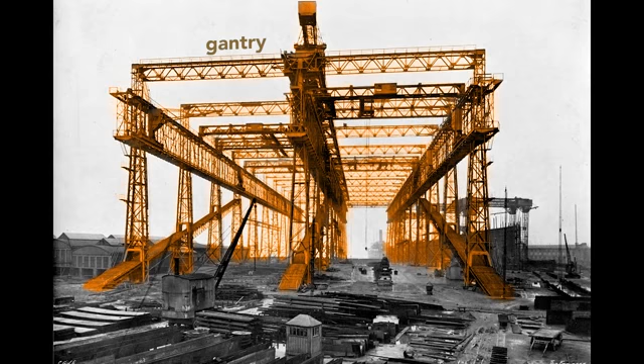This large framework, called a gantry, surrounds the ships as they are built. It supports the overhead cranes and scaffolding used by workers as they construct the Olympic and the Titanic. Notice that just beyond the far end of the gantry lies the Belfast harbor.

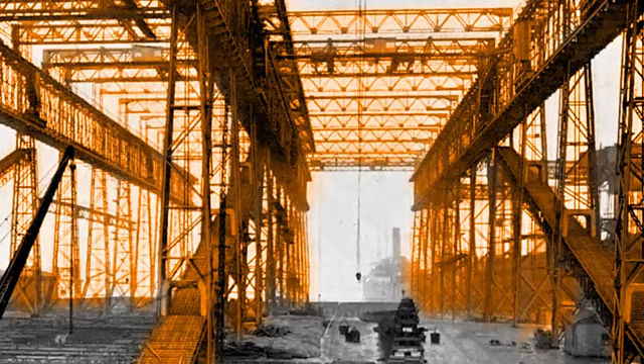Workers will build the Olympic here on the right, and then 9 months later, before the Olympic is finished, they will start on the left the Titanic. When completed, the Olympic stern, or rear end of the ship, will point toward the harbor.

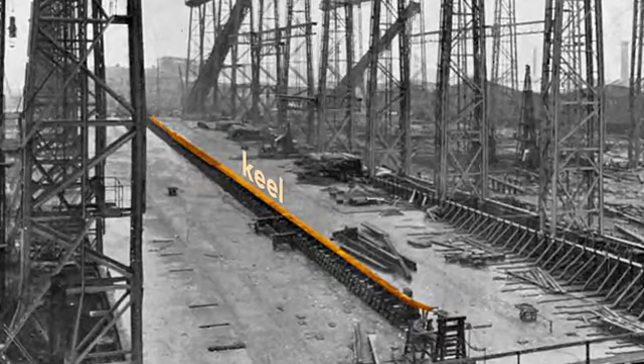The ship's construction starts with its keel, seen here as a long, dark shape. The keel is the backbone of the ship and gives the ship rigidity. If we look at the keel from the land side, we see the keel blocks that support it. These wooden blocks, typically pine, separate the ship from the slip, the concrete floor of the gantry.

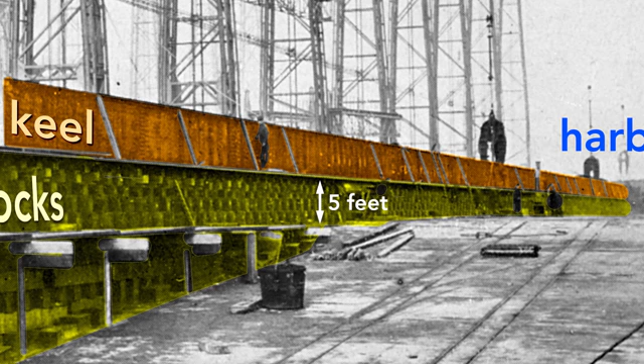It's made of steel plates and is sometimes called the tank top because the double bottom contains 44 watertight tanks. Most of the tanks carried seawater used as ballast to balance and add weight to the ship, but some carried fresh water. In total, the double bottom carried over 5,000 tons of water, or about 1.5 million gallons.

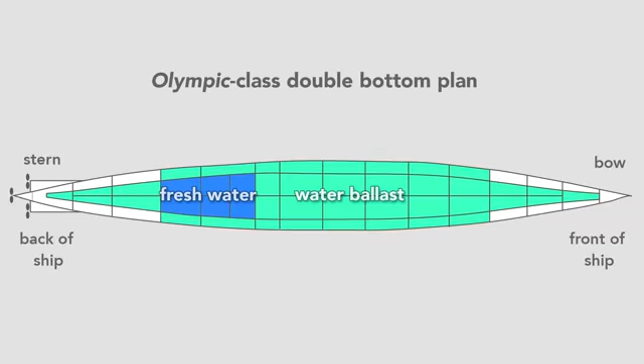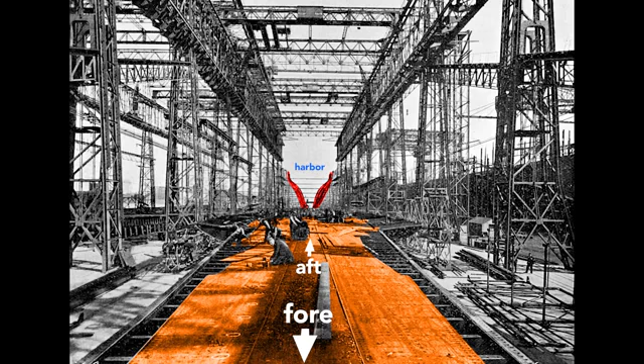Once they finish the double bottom, workers erect the framing for the hull. From this view, we see the framing for the stern of the ship. It's what a worker would see standing on the tank top from the fore and looking toward the aft of the ship. That's where the harbor is. Looking closer, we see the rib-like structure on the start of the transverse frame of the ship. Workers rivet to this frame the hull, which will form the skin.

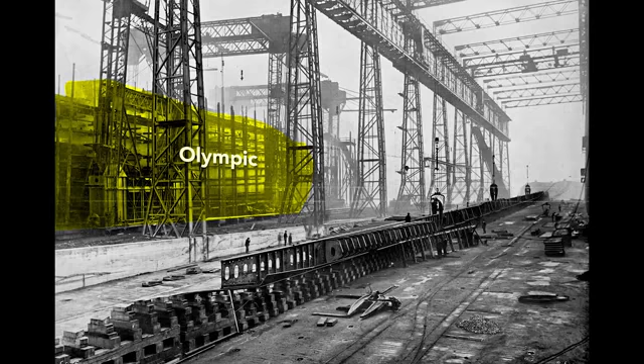So far, we've watched the Olympic's construction. In the gantry, that ship sits here in the background. In the foreground lies the keel of its twin, the Titanic. Its construction began 9 months after the Olympic. We see here, attached to the keel, the framework of the Titanic's double bottom.

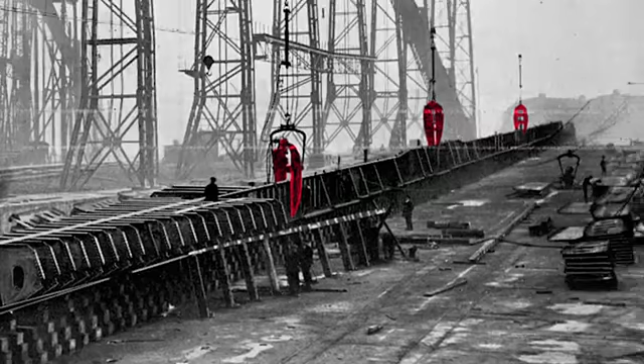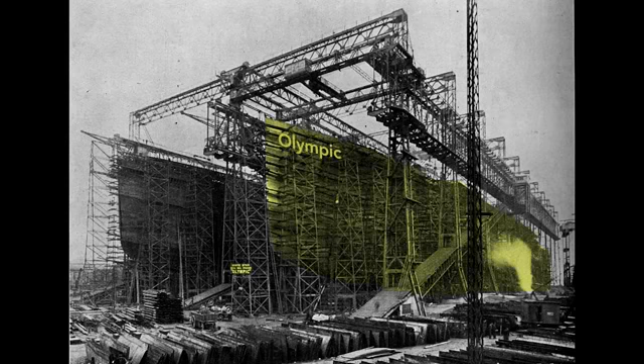Notice this large, claw-like mechanism lying on the ground, and these three hung from the cranes. These are hydraulic riveters, which workers used to install most of the 3 million rivets on the Titanic. Here we see the almost complete hulls of both the Olympic and Titanic. Work inside the Olympic progresses rapidly. The staterooms are being erected, and plumbing is being fitted throughout the ship.

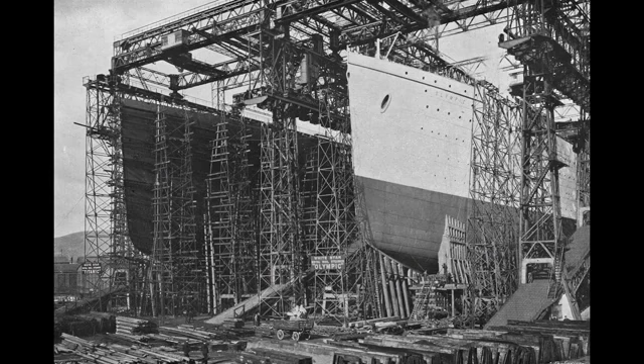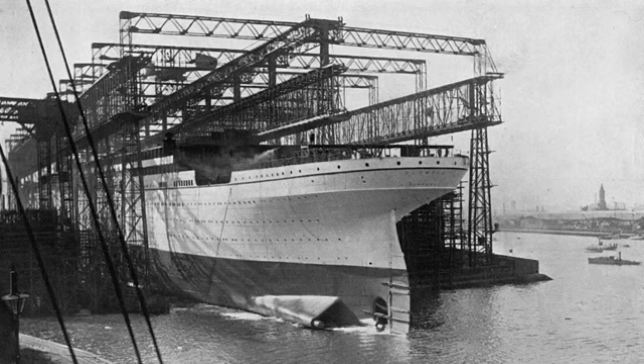To prepare for the Olympic's launch, workers paint the ship a light gray so it will stand out in black and white photographs, although they repainted the ship black soon after its launch so that it matched previous White Star liners. To ease the slide into the water, the slip was greased with 23 tons of tallow, oil, and soap. And then the order to release the ship was given, the hydraulic triggers were released, and the ship slid into the harbor, reaching a speed of 12.5 knots.

Notice that the ship is launched backwards. There are many reasons for this, but among them is that the stern, the rear, is wider than the bow, so it is more buoyant. In a mere 62 seconds after launch, the Olympic was afloat. The moment the ship hit the water is its official launch date, although it was mostly empty.

Here it weighs only about 27,000 tons and so rides high in the water. The draft, the vertical distance between the bottom of the ship and the surface of the water, is only 18 feet. After it is completely fitted, it will weigh nearly twice that, 52,000 tons. With that additional weight, the Olympic will drop until the water reaches the border painted on the hull, a draft of about 34 feet.

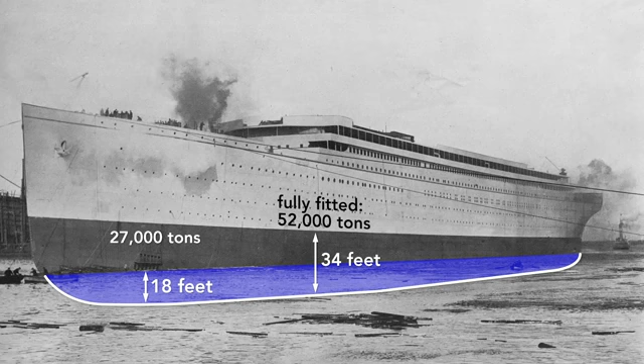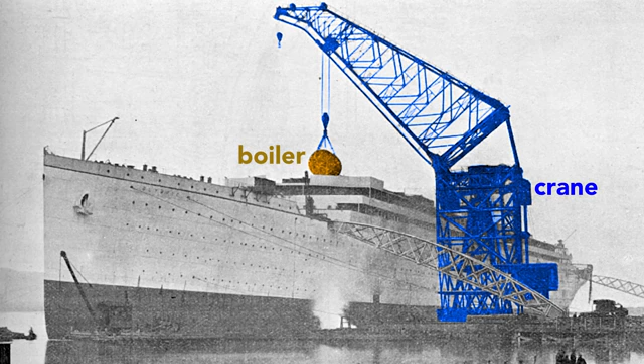The Olympic cannot move by itself, and so a tugboat tows it to the fitting out quay where a gigantic crane loads the ship. Here the crane lifts aboard a cylindrical boiler. The final fitting, including attaching the propellers, is done in dry dock. And then, once everything is in place, the Olympic is ready for the sea.

7 months after this launch, the Titanic was launched. I have from this journal a few photos of that event, but keep in mind the Olympic got the big press because it was first. The Titanic only becomes of more interest in retrospect. This photograph shows the twins, the Olympic and Titanic.

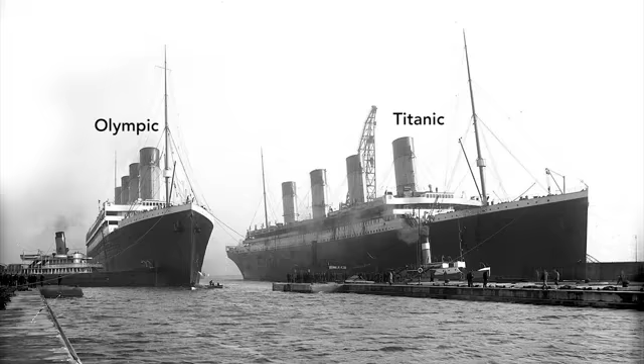Although built side by side, this was the last time they were photographed together. Less than a year after the launch of these two giant ships, one suffered a collision that ripped a gaping hole in its side. That ship was, of course, the Olympic.

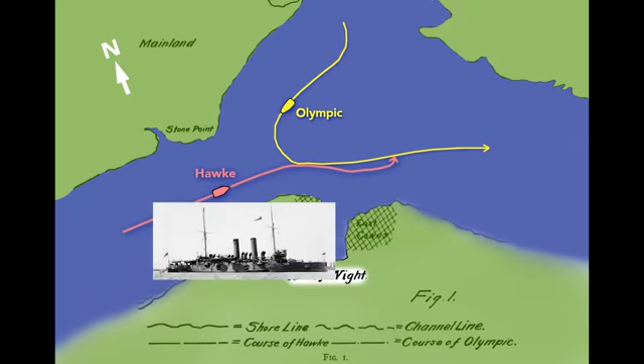In September of 1911, the Olympic departed the port of Southampton, England, sailing toward the Isle of Wight. The Olympic turned into the Solent Strait and passed a British warship, the HMS Hawke. The Hawke's commander was surprised by the Olympic's wide turn, but he managed to take a safe position behind and to the right of the Olympic. The Hawke then increased its speed to pass the Olympic, but the Olympic's wake sucked the Hawke inward rapidly.

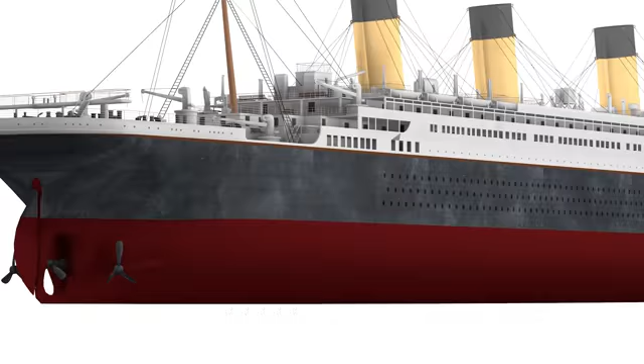The Hawke tore a large hole in the Olympic, and below its waterline, the damage was even greater. The bow of the Hawke was completely smashed in. The Olympic limped back to Southampton, where the holes were temporarily patched with wood before returning to its home dock in Belfast for repairs.

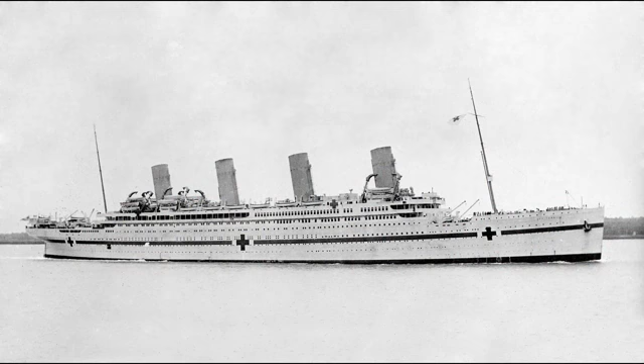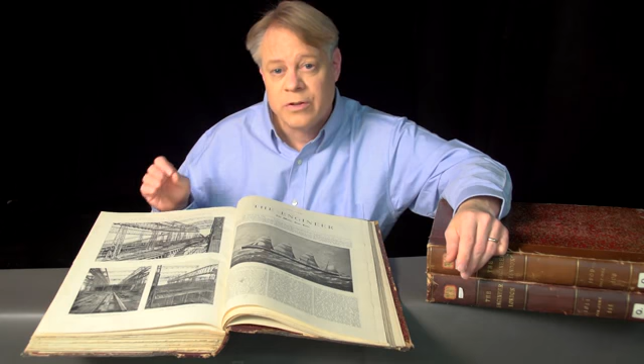The Olympic's sibling also suffered a traumatic blow that caused it to tragically sink. I'm of course talking about the Britannic. The Britannic was the same size and very similar to the Olympic and Titanic. Although intended to be a passenger liner, the ship was drafted into military service in World War I as a hospital ship. While in the Mediterranean, it hit a mine or was struck by a torpedo and sank in less than an hour. Despite these accidents, the Olympic-class ships were great feats of design and workmanship.

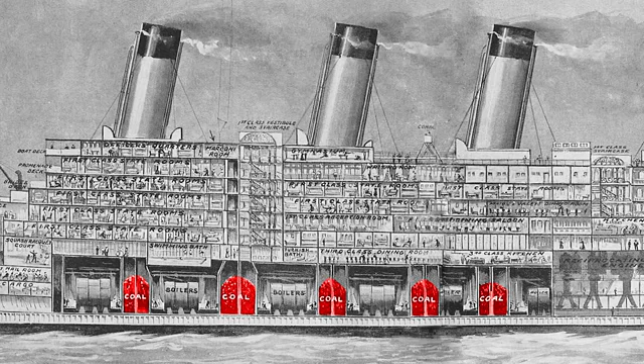Just consider the propulsion system of the Titanic. The ship had two sets of reciprocating engines. These engines were fueled by coal, which was stored along the bottom of the ship. Exhaust gases from the boiler discharged through these smokestacks, which are frequently called funnels. Now, they don't look like funnels until you look at them the right way. They're upside-down funnels. This cross-section of the Olympic shows the boilers sitting atop the double bottom. Exhaust from the boilers is funneled up and out of the ship.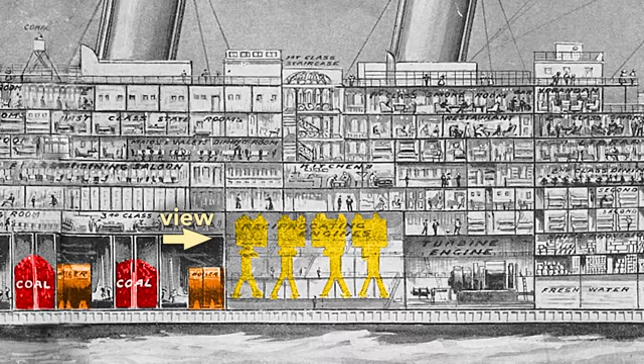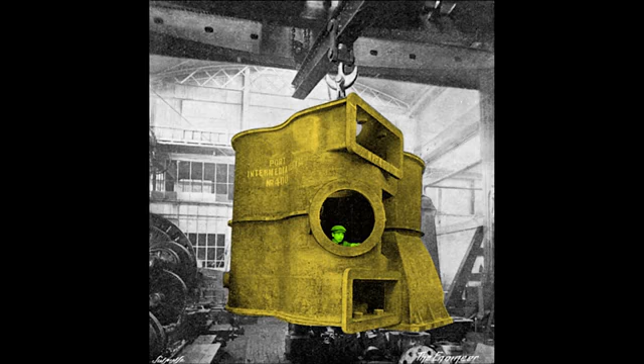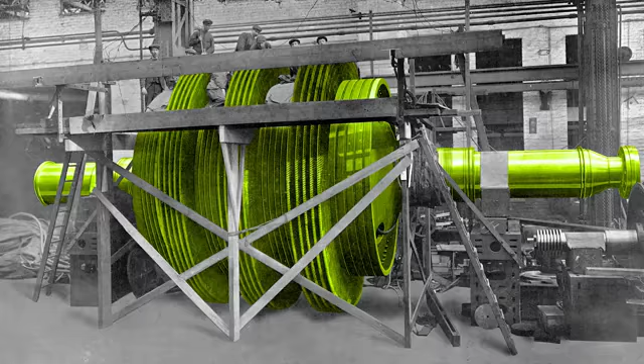The steam was piped to these reciprocating engines. The engines, when viewed from the front of the ship, look like this. The orange is the piston rod, and inside the cylindrical casing is the piston. This worker peering out of this casing gives a sense of the engine's size. Excess steam from these engines was used to drive a turbine engine. This shows the turbine under construction and without its outer casing. Note the workers at the top. This is huge. If you look closely, you can see that the turbine is made of hundreds of individual blades.

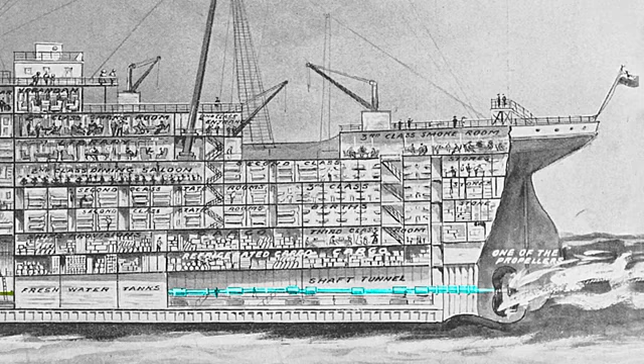A shaft transfers power from the engines to the propellers. The ones on the left and the right were powered by the reciprocating engines, and each propeller weighed 38 tons, while the central propeller was powered by the turbine engine. It was cast as a single piece of manganese bronze and weighed 22 tons. The outer propellers were used for tight navigation of harbors, while the central propeller was used only in open seas. Also, unlike the others, the central propeller could not be driven in reverse, only forward.

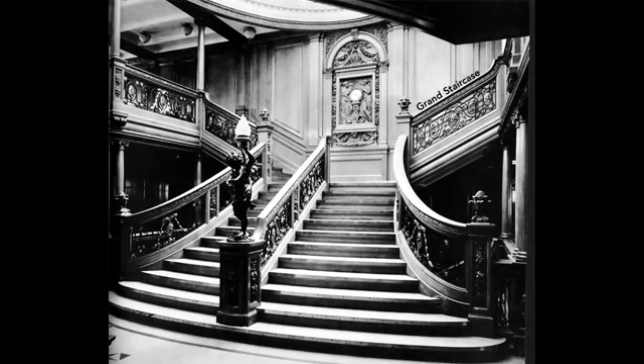Even with this powerful propulsion system, the Olympic-class ships were not the fastest at the time, which was intentional. The White Star Line decided to focus on comfort and luxury over speed. It's clear that the lavishly decorated rooms on the Olympic and Titanic certainly made the passage more enjoyable, but there were some hidden design choices that made these ships the pinnacle of comfort for all classes of service.

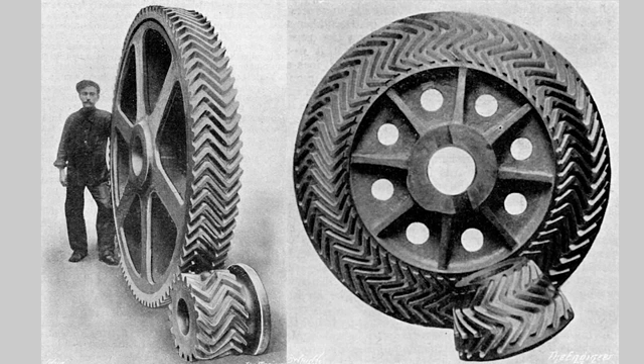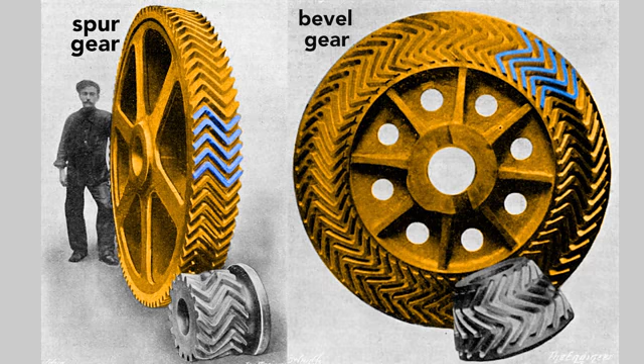The ships were steered using these helical gears. Each ship had two sets of both the spur gears and the beveled gears. These massive gears are nearly 6 feet across, made of solid steel, and each weigh thousands of pounds. Notice the herringbone pattern on the teeth. This pattern allowed a tight engagement of the teeth and resulted in reduced vibration transmitted to the rest of the ship. Altogether, the gearing on the Titanic weighed about 7.5 tons.

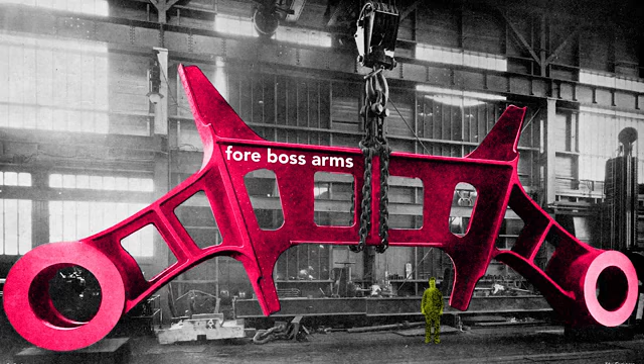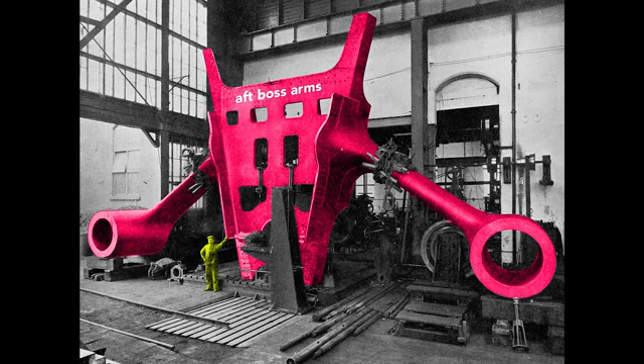This very large structural piece is called the boss arms. These arms held the shafts of the outer propellers in place, and because of their size and strength, they reinforce the hull, which reduces panting. Panting occurs when variations in water pressure, say the crest versus the trough of the wave, flex the hull inward and outward. Less flexing results in less vibration felt by the passengers. These boss arms, also called shaft brackets, were fitted 20 feet apart at the very aft of the ship.

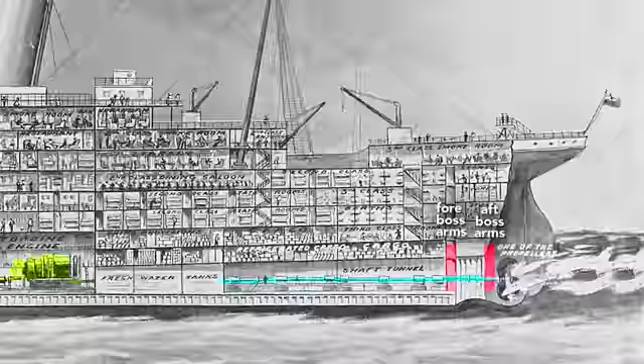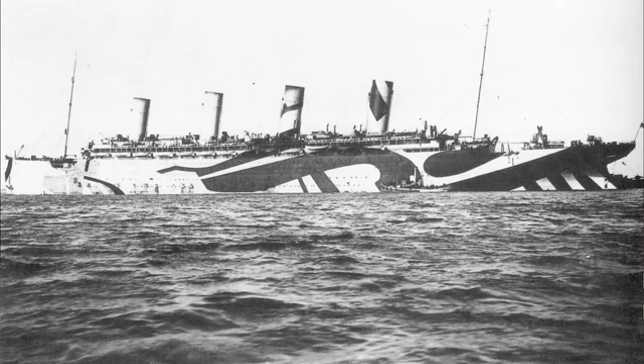While the Titanic and Britannic both had tragically short careers, the Olympic triumphed. In its lifetime, it made over 500 transatlantic journeys, carrying over 400,000 passengers and sailing 1.5 million miles. It even spent 4 years as a U.S.-Canadian troop transport during World War I, earning the nickname Old Reliable. After 24 years of service, the ship was decommissioned and scrapped for parts. The Olympic-class ships were absolute marvels of engineering. I hope it's for their revolutionary design rather than their failures that they're remembered.